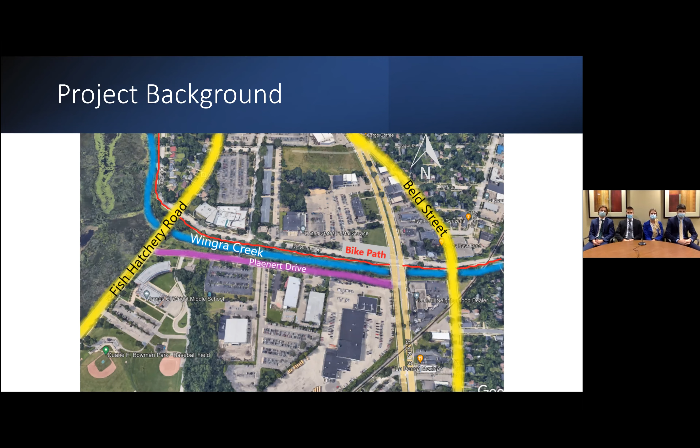Now we will do a flyover of the existing corridor. We can see where Plaenert Drive is in comparison to the rest of the city of Madison. When we start this walkthrough, we will go over on the west side, beginning at the intersection of Fish Hatchery Road and Plaenert Drive. When we fly through this area, we can really see how close these roads are to the creek. They almost block off this creek and make it very difficult to access this waterway. And you can also see the minimal amount of green space between the creek and the road itself.

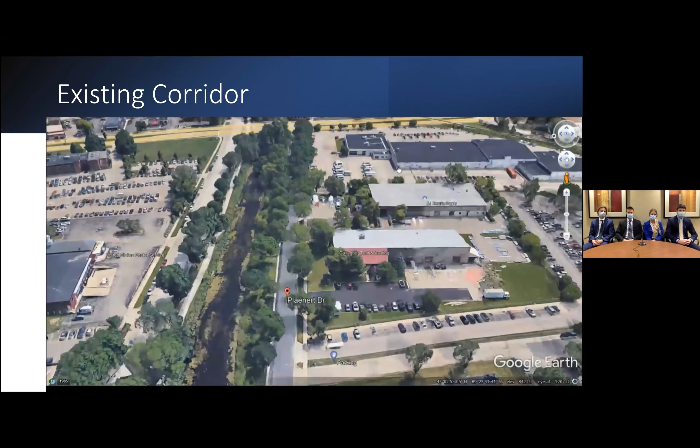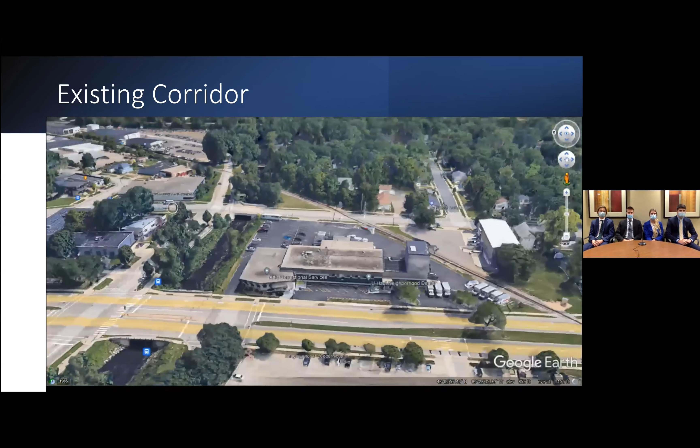The road coming up next is South Park Street, where the park will end. And the road next to it is Beld Street, and this is where the multi-use path that is being added into this park will end.

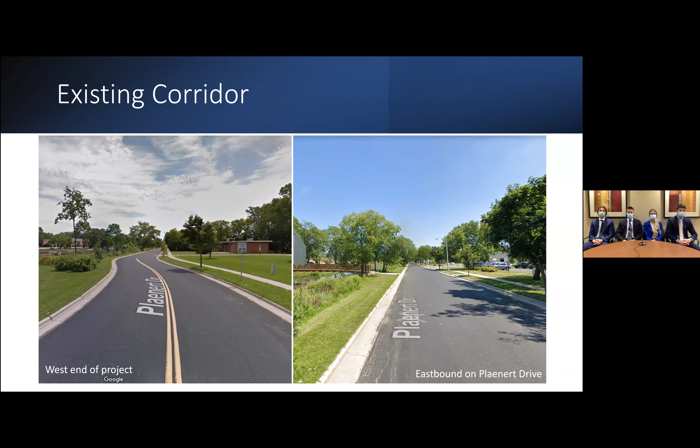These are some street level views of Plaenert Drive. The photo on the left is the west end of the project. This is right after the intersection of Fish Hatchery Road and Plaenert Drive. The photo on the right is if you're walking east down this street. In these photos, you can also see the minimal amount of green space between the road and the creek itself, and the driveways of the business owners that use Plaenert as their primary access.

Here on the left, we have another view of Plaenert Drive if you are walking further east, and the photo on the right is the east end of the project, right before the intersection of South Park Street and Plaenert Drive. And if we focus our attention to the photo on the left, this is what we see when we look down this corridor right now. After this project is completed, the green space will extend all the way over to the sidewalk, and when we look down this area, we will see people in the environment interacting together in a sustainable way.

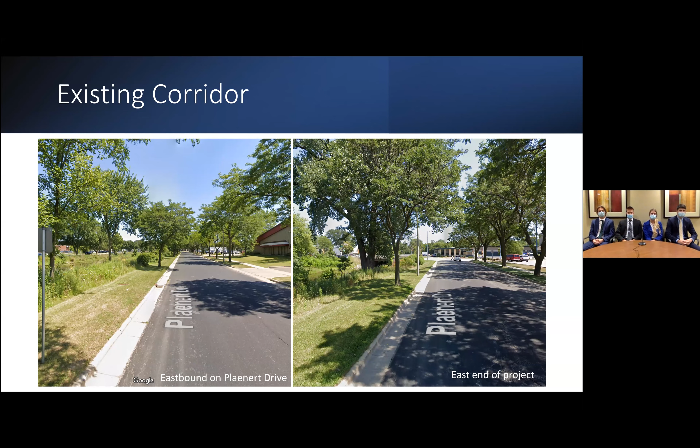Some of the goals of this project include developing a green space with amenities. This will be done through abandoning Plaenert Drive and reconstructing it into a park setting. Maintaining access to property owners is very important since a lot of them use Plaenert Drive as their primary access. So there will be an alternative road connection designed so they can still access their property.

The value of Wingra Creek will be highlighted through maximizing the green space next to this area and making it easier to get to this waterway. And lastly, the water quality will be improved mostly through mitigating runoff that goes into the creek, which we will discuss more in our final design.

Some constraints of this project include environmental concerns. There is nutrient and contaminant runoff that goes into Wingra Creek. There is native habitat all around the creek that must be maintained and enhanced. This photo on the right shows the property lines in red of this area. So there is privately owned land that is a design constraint.

There are existing utilities in this area, such as storm, sanitary, gas, cable, and electric, that are also a design constraint. There are regulatory conditions that must be met, such as meeting the DNR codes and standards and the City of Madison standard specifications. And lastly, there is a budget to this project of $3 million.

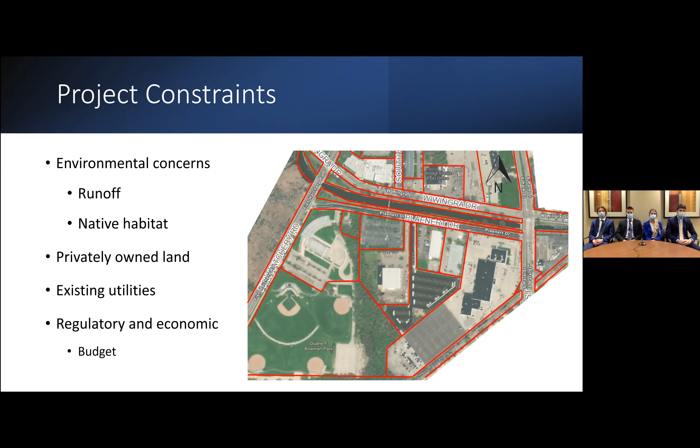So with those project goals and constraints in mind, we as a team were able to develop a final design solution. We believe this design solution not only meets the needs of Clean Lakes Alliance, but also the community as a whole by placing the waterfront as the center of the community.

So in this design solution, we focused on developing the green space while also providing an alternative design of a roadway. This roadway can be seen on the left end of the project. This roadway extends off of Fish Hatchery Road, where it then will transition into a cul-de-sac. This cul-de-sac will provide access for turnarounds such as buses and vehicles that will be accessing the middle school.

Coming out of the south end of this cul-de-sac, the roadway will then continue around an existing parking lot before then turning east to access all the businesses in the region, maintaining access to all of them. Also on the west end of the project is a non-motorized boat launch. This boat launch will have a pea gravel driveway that will then attach to the alternative roadway for small vehicle access to launch canoes and kayaks into the creek.

We believe this boat launch is very beneficial for the local middle school, as they frequently like to launch kayaks and canoes into the creek itself. Coming off of the east end of the cul-de-sac is the pedestrian walkway. This pedestrian walkway will extend across South Park Street all the way to Beld Street. It will also provide access to 2 viewing boardwalks that overlook Wingra Creek.

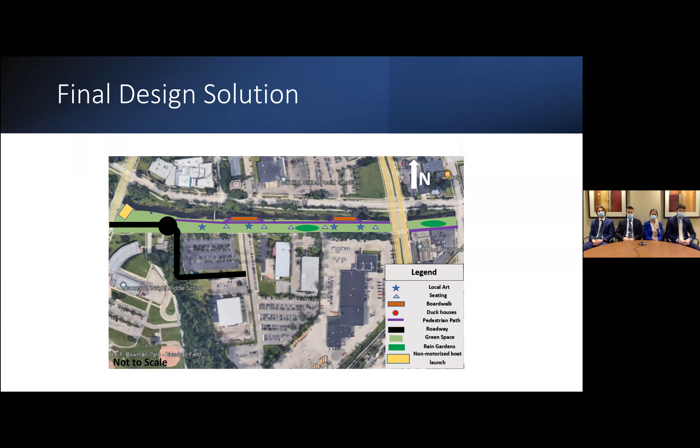Back one slide, please.

Thank you. Here's a more detailed visualization of the final design solution. So this is the view looking southeast towards South Park Street. This is one of the main viewing boardwalks within this design. This viewing boardwalk will provide access for park visitors to directly look at the animals and habitat that are within the creek, which highlights the value of Wingra Creek to this entire region.

In the upper left-hand portion of the image, you can also see a visualization of the rain garden. Once again, like I said, these rain gardens not only provide aesthetic beauty, but they also will treat stormwater runoff by filtering contaminants and pollutants before the water is then discharged into the creek.

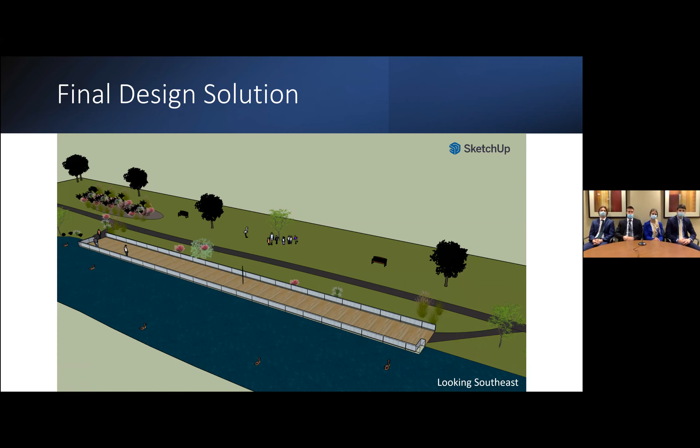This is a view of the second viewing boardwalk. This is looking west. In the upper right-hand portion of the screen, you can also see the non-motorized boat launch. This non-motorized boat launch will provide direct access for park visitors to access Wingra Creek, whether that be for kayaking or canoeing. This viewing boardwalk also will provide access to see any animals that are in the creek, such as the wood ducks or mallards that would be attracted through the use of our duck houses.

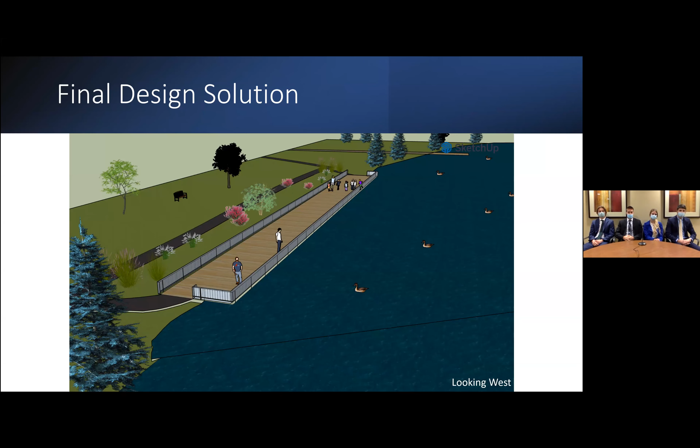This is a view looking west down the entire designed corridor. As you can see, the pedestrian path meanders back and forth, which provides up close viewing of the creek in some portions, while deviating away from the creek in other areas. Here you can see the first viewing boardwalk that I outlined. The second viewing boardwalk cannot be seen because that is further down in the project. There's also ample green space within the region to provide areas for relaxation, as well as shade and activities.

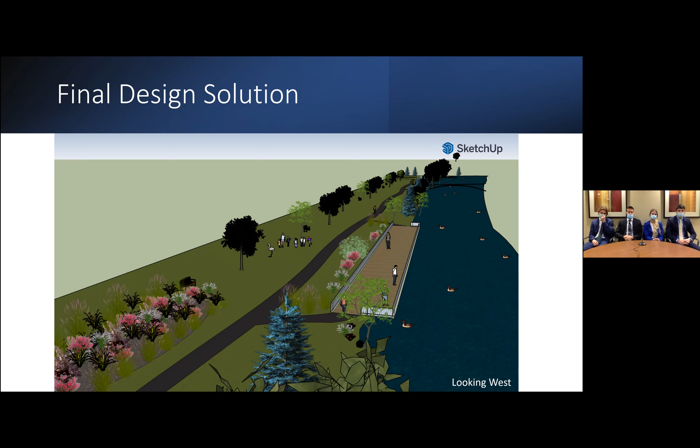Here are some attributes of the final design that we would like to highlight. So in the upper left-hand portion of your screen, you can see what the rain gardens would look like. Not only do these provide aesthetic beauty, they also serve a purpose of treating the stormwater within the region. In the upper right-hand corner is an example of the green space that is to be developed. This green space will have areas that are clear with just grass in order to provide areas for activities as well as just relaxing. And there will also be trees for shade and to view, as well as ample seating.

In the lower left-hand portion of your screen, you can see one of the viewing boardwalks. These viewing boardwalks will also have educational signage along the railings. This educational signage will educate park visitors on not only the wildlife within the region, but also some of the history and the plants. In the lower right-hand portion of your screen is an example of the duck houses that will be placed along the creek. This will help bring habitat back to the region by attracting species such as wood ducks and mallards for public viewing.

So keeping in mind that healthy lakes are what bind communities together, we're going to take a look at a couple of the pollutants that threaten water health. So the first major threat to water quality in this area is runoff due to phosphorus. So the primary source of this phosphorus is from the agricultural industry, but also from the fertilizers that we use residentially in our own lawns and gardens.

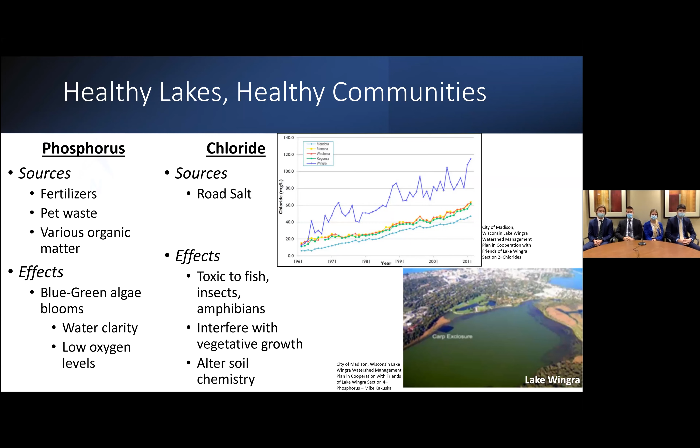Moving on to the more social aspect, the runoff from these pollutants has caused beach closures on Lake Wingra over the last decade. One of the causes of this is from cyanobacteria, which are those blue-green algae blooms. And so these are large bacteria colonies that are not only unsightly and unhealthy if consumed by humans or animals, but they decrease the ability for people to interact with the water and each other through the water.

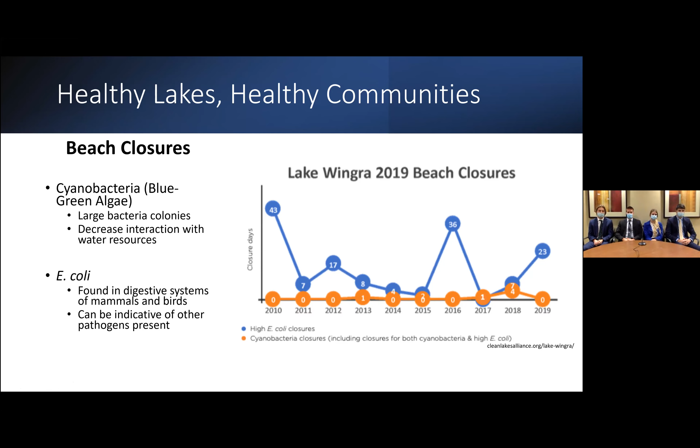The other major culprit of these beach closures, which is pictured as the blue line in that graph, are from E. coli outbreaks. If you're unfamiliar, E. coli is a bacteria that is from the digestive system of mammals and birds. And E. coli often finds its way into a body of water by running off of impervious surfaces, such as one we might have as Plaenert Drive, where it's allowed to directly drain into storm sewers and then something such as Wingra Creek. And when you have E. coli, it's often indicative that there may be other dangerous pathogens as well.

So in order to quantify the environmental impact of our rain gardens, we used a software tool called WinSLAMM V10. What it does is it lets you input your parameters of a rain garden, like we have in the bottom right, which is what we used for our westernmost rain garden, in accordance with the Wisconsin DNR rain garden specifications, which is pictured in the bottom left.

And the way we modeled it was by considering before our project, before the rain gardens, where we have Plaenert Drive and the sidewalk there, and then comparing it to after the rain gardens, once the green space has been revitalized, where those spaces have now been converted to green space. And the picture on the upper right is to give you a scale of generally how big our rain gardens are going to be.

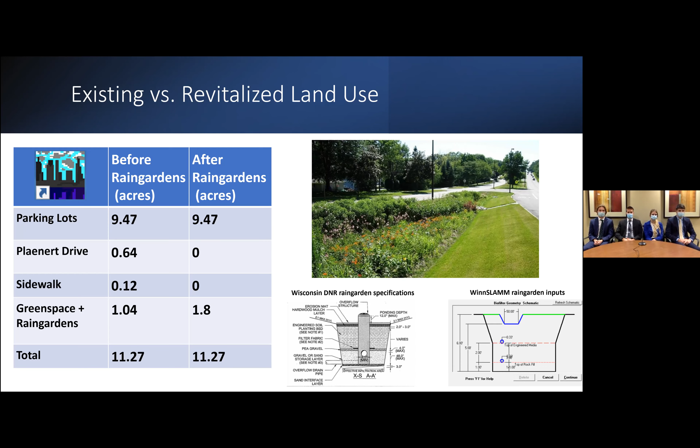The second one is total suspended solids, which was reduced by 29 to 33%. This is a measure of the urban contaminants, organic debris, and other very fine particles that are able to flow within water.

And so we've reduced these that would also run through a storm sewer and into Lake Wingra. Finally, we have our phosphorus reduction, which was 22 to 33%. This, once again, is a function of less organic debris that would be collecting on the streets and the storm sewers that no longer drains directly into Lake Wingra, or Wingra Creek, excuse me.

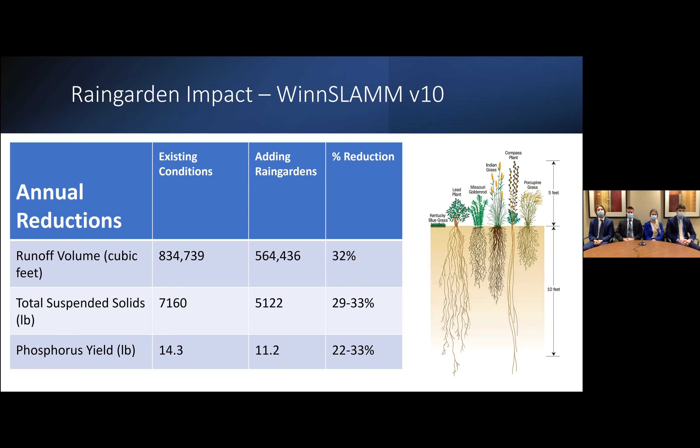Looking at the more aesthetic aspect of our rain garden, we wanted to select plant species that not only attract a diverse biology of pollinators, insects, and other animals to our rain garden, but also ones that bloom at different times of the year so that visitors can enjoy our rain gardens throughout the growing season.

Other considerations were that we wanted to select plants that are tall enough to stand out in our rain gardens, because they do sit about 2 to 3 feet below the surface. Also, we have a considerable amount of shade in the region just from the trees.

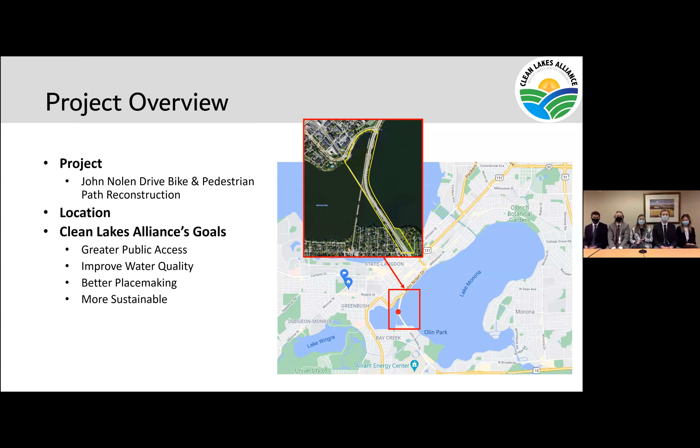A little bit more about our project. As you can see highlighted in the image to the right, a zoomed-in photo, the yellow outline is the exact project boundary of where we're focusing. The location extends in the north from North Shore Drive all the way down to the southern point in Olin Park. We'd like to highlight Clean Lakes Alliance's goals, which the other team mentioned as well, including greater public access, improving water quality, better placemaking, and making the project more sustainable.

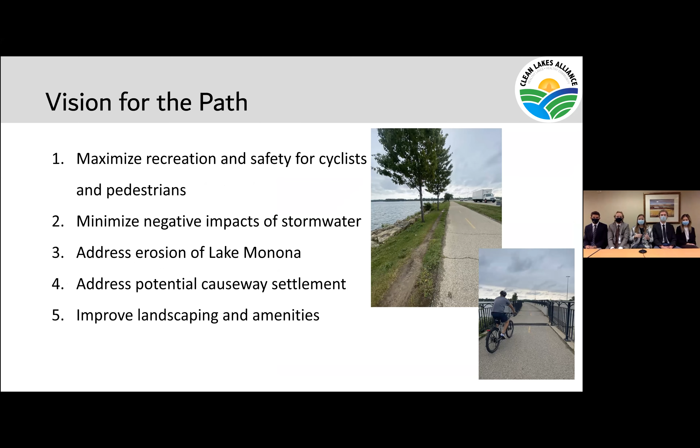A little vision for the path: we'd like to maximize recreation and increasing safety for cyclists and pedestrians along the path. We'd like to minimize negative impacts of stormwater, address erosion of Lake Monona, address potential causeway settlement, and improve landscaping and amenities for the project. As you can see on the right, those are some current conditions of the path.

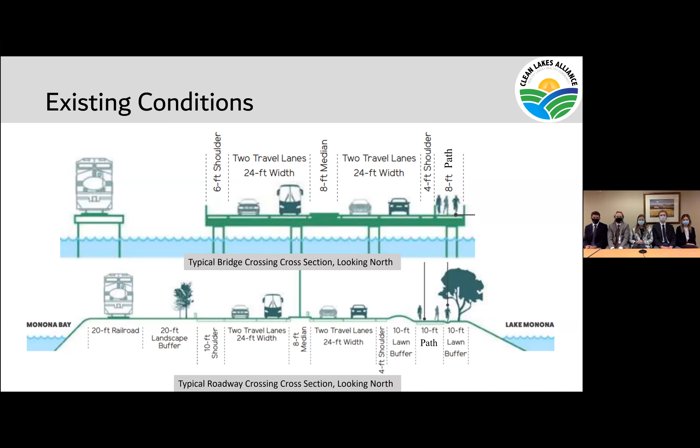So in order to follow our vision, we've come up with some final design categories that ultimately helped us choose between alternatives and select the final design. These were chosen because we thought they were the areas that needed the most improvement along the path. The first is lane design, which pertains to the actual design of the bike and pedestrian path itself. Next is safety, which involves safety for pedestrians and bikers as opposed to the roadway. Piers and outlooks, which will provide recreation and accessibility options for pedestrians and bikers.

Shoreline protection, which will address the growing concerns of erosion from wave activity and runoff. Sustainability, which will further Madison's reputation as a green city. Stormwater management, which will help aid in the removal of pollutants and trash that gets into Lake Monona and further lakes. And lastly, we have amenities, which also provide further recreation to pedestrians and bikers.

Along with this, we will have a 2-directional bike path that is parallel to the boardwalk. In the northern section where the boardwalk ends, it will narrow down to a single lane pedestrian path, and this is also similar on the southern end in Olin Park.

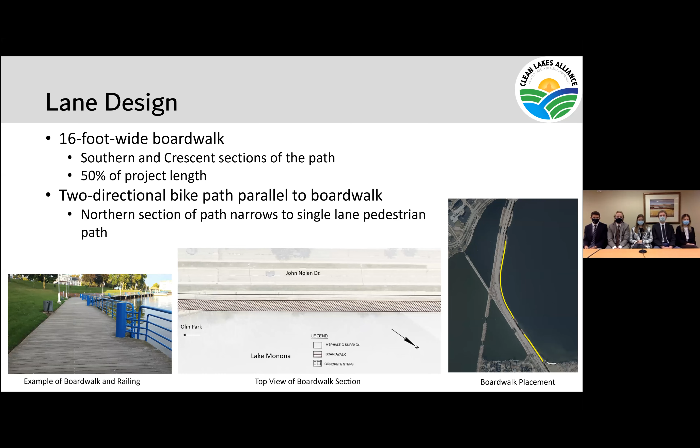Our next category is safety. For safety, we have decided to reduce the speed limit from 45 miles per hour to 30 miles per hour on John Nolen Drive. We have also decided to include some cable guard, which will be placed in the areas where the boardwalk needs to come back from the water edge towards the roadway because it has to meet the bridge crossings.

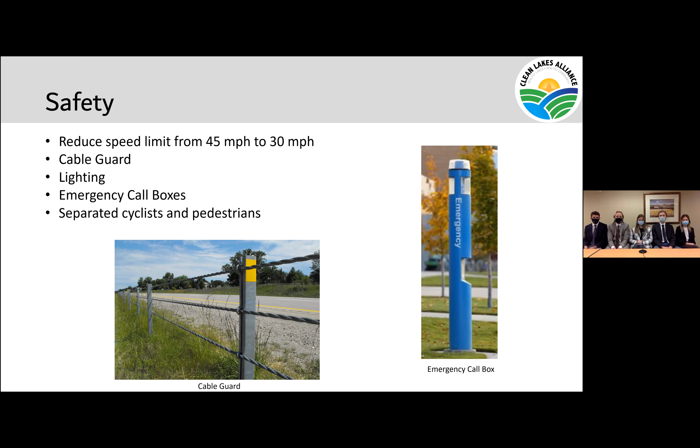This is the area where the distance between the road and the pedestrians and bikers will be decreasing, and that's where the cable guard will be used. We also will be including some lighting along the path and emergency call boxes. Another aspect of safety is that we have separated the cyclists and pedestrians into their own paths and moved them further away from John Nolen Drive.

Next, we have our outlooks. There will be 3 total outlooks along the path. The first type is the Capitol outlook, of which there will be 1. It is called the Capitol outlook because it is placed in a certain location that gives you a perfect view down Hamilton Street at the Capitol building.

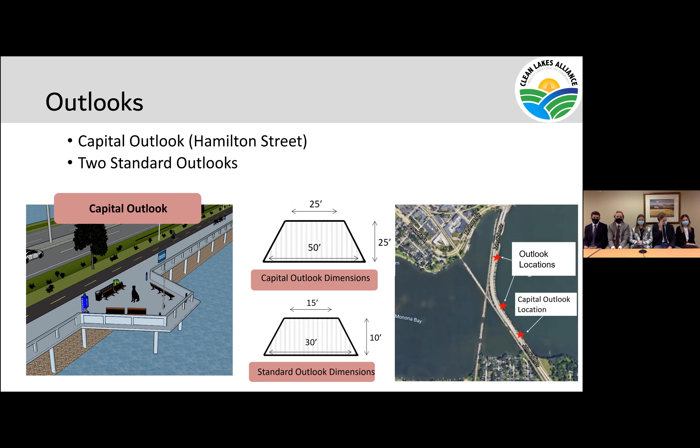Additionally, we will be including floating bog interceptors, 30 of which in total. These are a floating platform of vegetation that eventually connects to the lake bottom through its roots. It will absorb the wave impact to reduce erosion and trap sediment to reconstruct the eroded shoreline. These 30 interceptors will be placed along the entirety of the shoreline.

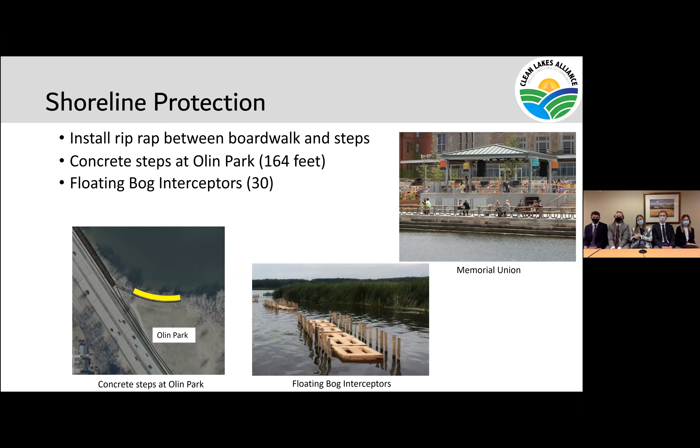Next, for sustainability, we plan to use local and recycled materials, such as composite decking for the boardwalk. We will also be including no-mow native vegetation between the path and the roadway, which can also be explained as a bioswale that will help filter stormwater through the soil.

Additionally, we will be including solar-powered lighting, which Freddie mentioned earlier. This will include an aspect of renewable energy throughout our project and can be an easy to see sustainable aspect as you're driving or walking down John Nolen.

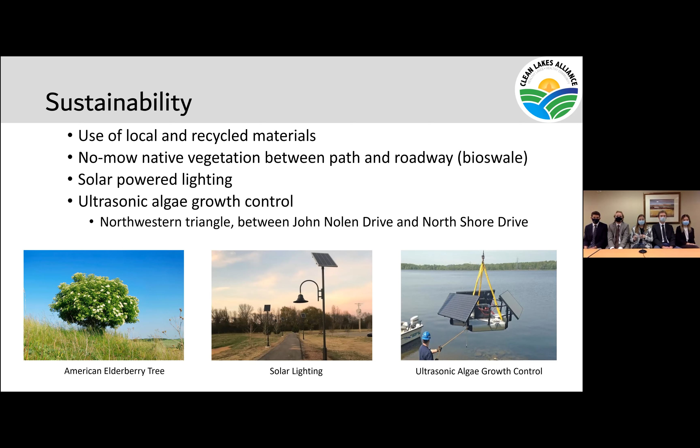Our last aspect of sustainability is an ultrasonic algae growth control. We'll be placing one of these in the northwestern triangle between John Nolen Drive and North Shore Drive. It emits a frequency that blocks algae from growing, which will hopefully reduce the amount of algae bloom growth that occurs in Lake Monona in general.

Our next large category of our design is stormwater management, specifically of the runoff from the path. We'll be including bioswales and rain gardens. A rain garden is where water runs through bioretention soil, which helps retain water from large storm events.

Eventually it seeps through into a drain pipe that runs into the existing stormwater system and out to Lake Monona. This will help remove pollutants that would otherwise directly go into the lake. Throughout the entire project, we'll be including 1,050 feet of bioswale.

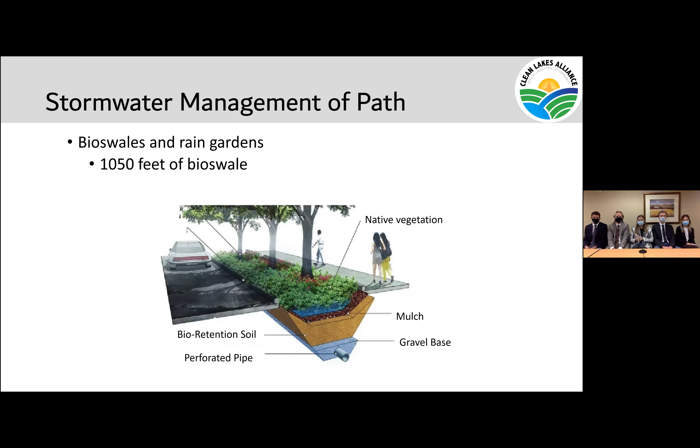Next, to move on to the stormwater management of the road, we will be including catch basins and sumps, which will feed into baffle boxes. A sump catch basin is built into the existing stormwater system. It will allow larger sediment to settle as well as trap oil and grease for removal before moving onto the baffle box. The catch basin and sumps will remove 25% of the suspended total solids, and will also slow the peak flow from large stormwater events.

The baffle boxes are a natural filtration system that will allow sediment to settle to the bottom, as well as keep litter and other materials from entering Lake Monona. It will remove up to 85% of the total suspended solids, nearly 100% of the trash, and 15% of heavy metals.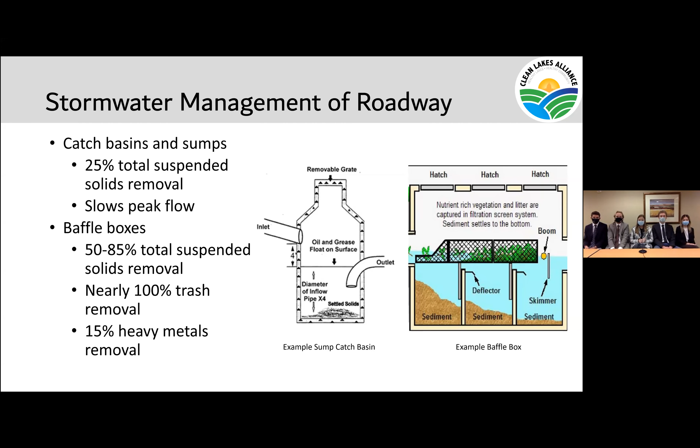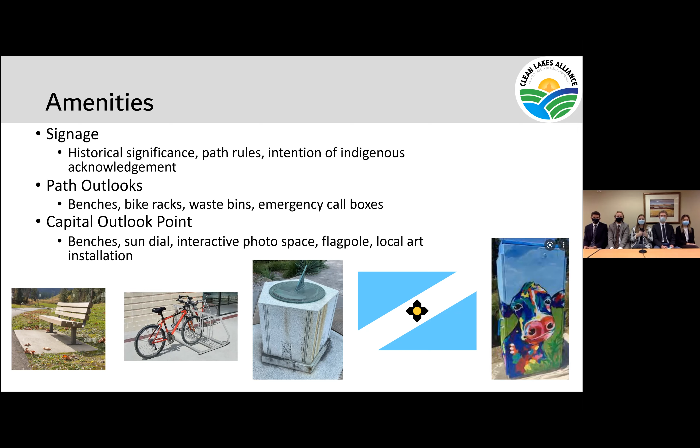And last, we'd like to include local art installation to really connect the community to this area. An example of local art installation already occurring in Madison is the Utility Box Project. This can be seen by the cow in the right photo. It's where local artists have their designs printed onto vinyl that will eventually be wrapped around utility boxes. This just adds a little bit of aesthetics and improves the natural look of utilities around Madison.

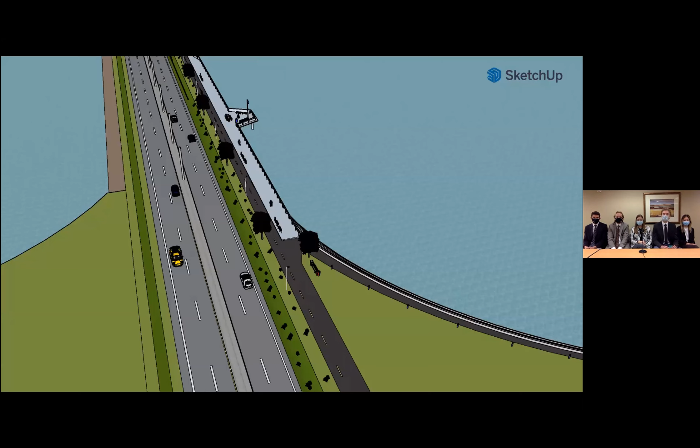Next, we'll be moving on to our animation that we created in SketchUp. As we approach the project, we'll be entering in on the southern bank near Nolen Park.

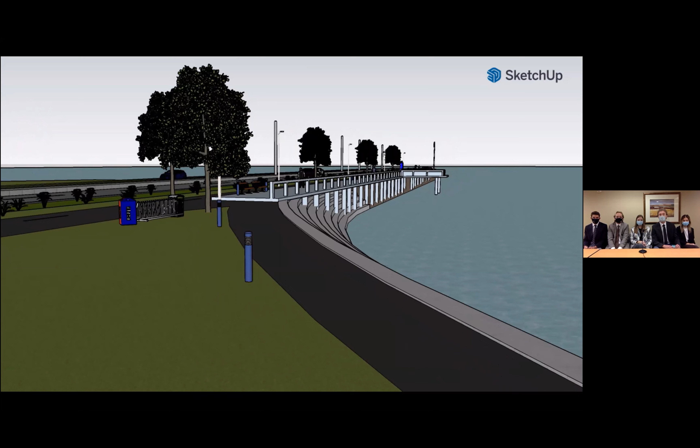From this perspective, you'll be walking on the banks of Nolen Park, where we'll have concrete steps on the right, and this is the 6-foot pedestrian path. Along the path, you'll see recycling bins, trash cans, and bike racks.

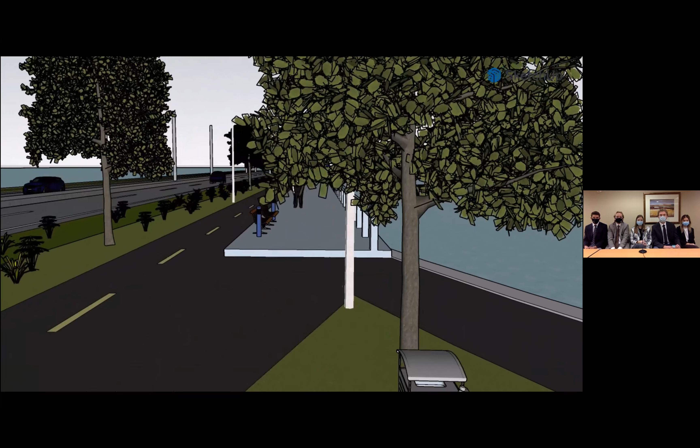As you walk along the boardwalk, you'll see benches for seating, and on the left, the natural vegetation and area for the bioswale, as well as the 2-directional bike path directly adjacent to the boardwalk.

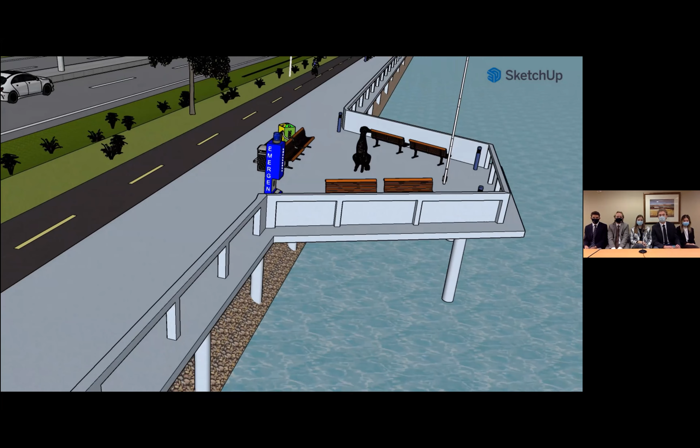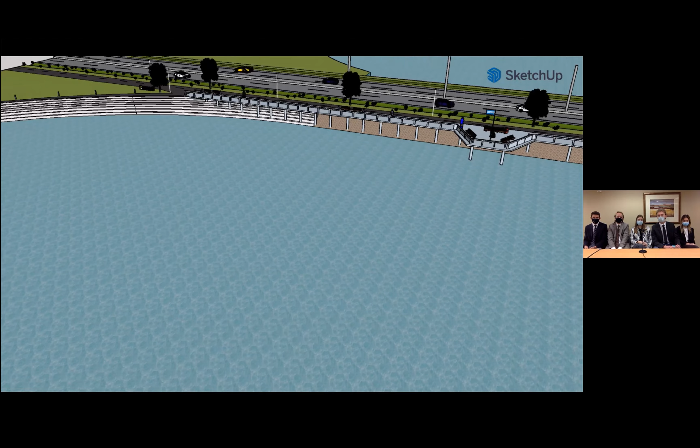And then as we approach the Capitol Outlook, you'll see the emergency call box, the statue in the center of the outlook, as well as the flagpole, and extra seating for Capitol and Nolen Park visitation. And then as we come away, you'll see the full part of the southern bank of the project on John Nolen Drive in Nolen Park.

Going into more specific design impacts, first we'll talk about economic design impacts. This project will promote more local tourism. By expanding the path, it allows for more pedestrian traffic as well as bicycle traffic.

Next, the environmental design impacts. By promoting interactions with pedestrians and the lake, it allows the community to become more connected to these bodies of water in a healthy and green manner, to improve sustainability and revitalize the importance of these lakes to this community. By improving the water quality and doing so safely, we can improve those interactions between the community and the lake.

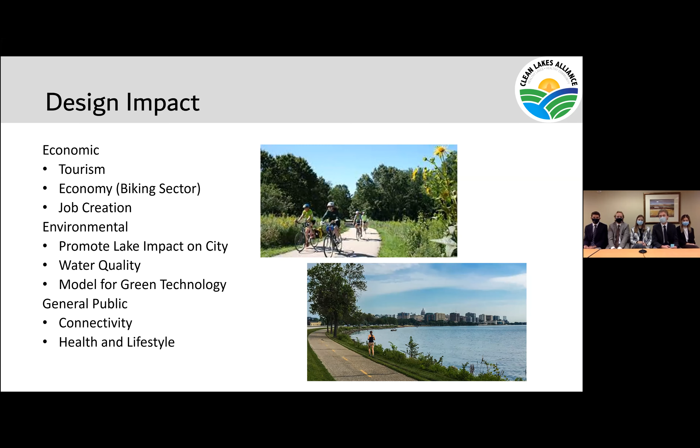And finally, health and lifestyle. By promoting activities such as biking, walking, and fishing, we promote a healthy lifestyle and encourage people to get outside and get some fresh air.

That concludes our project. Thanks so much for listening.

All right, that was a great presentation. Thanks for giving us an update on what that could look like. I drive on that stretch almost every day, and I've always wondered, right where you can see down Hamilton, why aren't they doing something there to really showcase that landmark? That's a really interesting part of the project. Just my two cents on that.

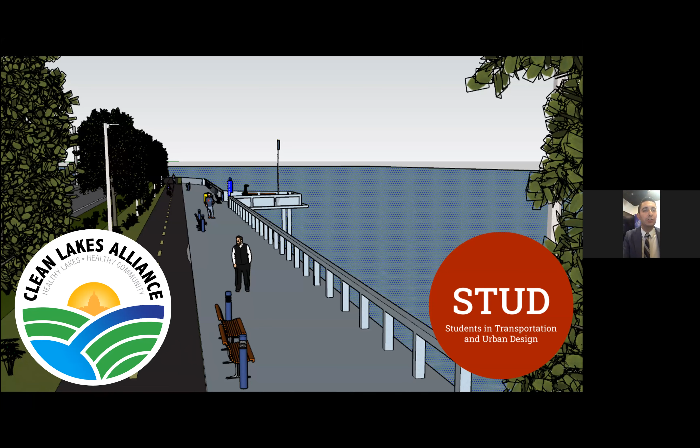Total suspended solids addressed in the design. Was there any modeling for nutrient reduction? So with bioswales, we are focusing on using salt tolerant plant species native to Wisconsin. These will help remove some of the chlorides mentioned in the previous presentation, as well as remove phosphorus, because as stormwater filters through the ground, phosphorus begins to stick to soil particles and is then slowly removed through the plants there.

Also a specific question here, Chuck asking for that side profile view of the different layers of the path. Did you guys look at porous pavement options for the bike path surface? Porous pavement was an option and it's still an option, but with limited resources in this area, it does seem to be a difficult option to fulfill. It could be costly too, but definitely something to explore in later design phases. Interesting to point out.

Chuck also has a follow-up question: does the boardwalk boundary go into the lake, or is it just along the shoreline? So what does that periphery look like? The boardwalk will hang over the riprap part of the lake, but most of the supports and stuff won't go into the lake directly, they'll overhang the lake. Oh, gotcha. Okay, so not on that lake exactly.